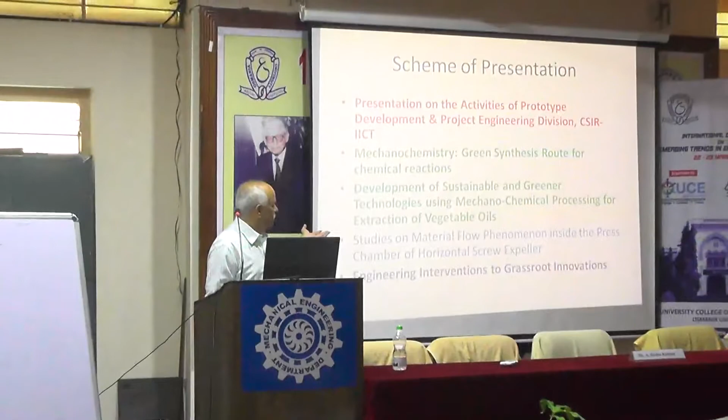I just try to take you through a brief spectrum of activities that I am currently involved in, and some part of it which is part of the talk, part of the work I am currently doing. This will give you a bird's eye view of the activities that go on. My scheme of presentation will be like this: I talk about what our department is, what we are doing, and then how I associate mechanical engineering with the synthesis of chemical reactions, and then what, as an engineer, particularly a mechanical engineer who doesn't know chemistry, the scope is and what you can do.

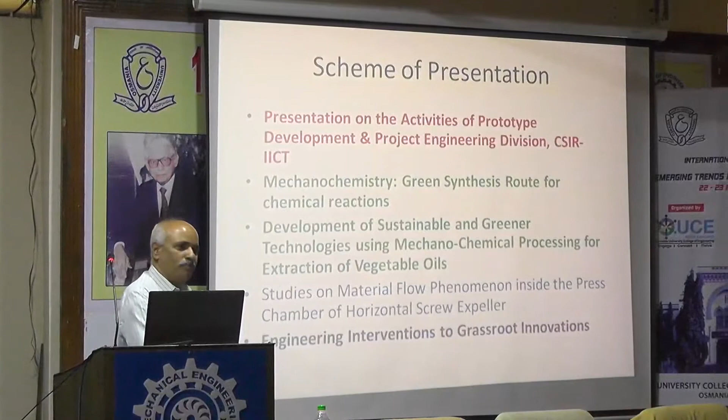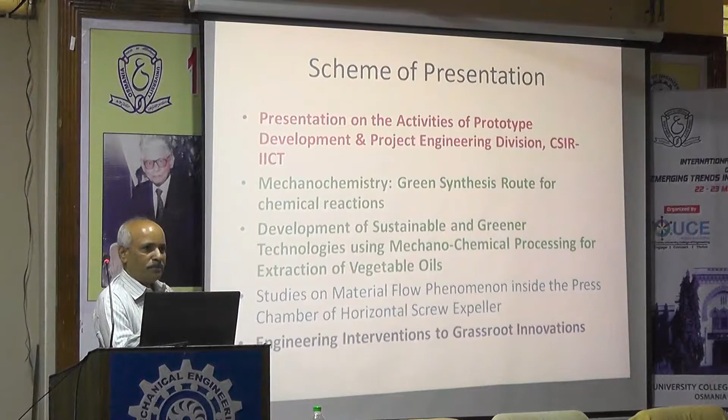So I'll take you to the development of greener technologies for extraction of vegetable oils through mechanochemical processing. And finally, we try to do something very interesting as a mechanical engineer, where we generally try to do mathematical modeling of various flows and stresses. What I am doing as an intervention into grassroots innovations, I'll try to cover as the last part.

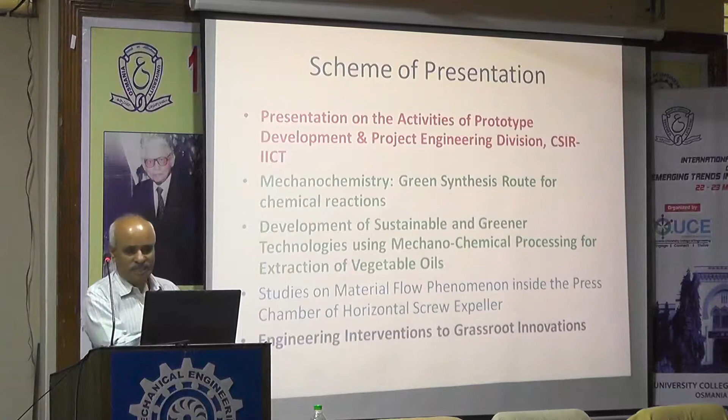So let me tell you about my department. My department provides electrical services and utility services like steam, air, water — all those that a chemical laboratory generally requires. We also provide design services for the complete institute development, particularly when it comes to construction and organization of facilities.

But as a mechanical engineer, one has to live like a Roman in Rome, because of the scope that we have. One of the simplest examples is mechanochemistry, where we use the understanding of mechanical engineering, particularly high energy milling activities that we generally do for metals. It is very prevalent in the field of metallurgy, where we look at size reduction as one of the important aspects.

So we try to associate ourselves where high energy milling, or high energy mechanical energy, is applied for conversion of chemical species into various products. I'll give you detail about it as I proceed. This is exactly what I am doing as a mechanical engineer in a chemistry lab. I faced a similar question when I was at the National Metallurgical Laboratory as a metallurgist — what is the role that I have?

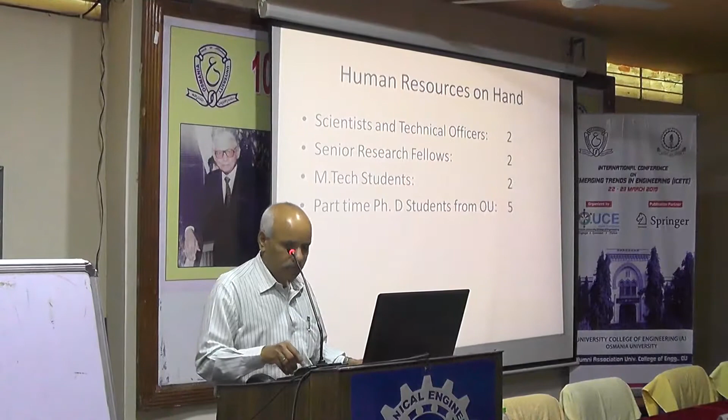Of course, as I said, it is a central workshop. We have all machining, fabrication with me, and they are working in the biomass gasification area. There are about 10-15 students registered with me from mechanical engineering, from OU particularly, but there are 5 active students working, and now some of them are very close to submission.

Now I just try to give you a bird's eye view of what is mechanochemistry, what is this green synthesis route we can conceive for chemical reactions. Particularly when we see as a mechanical engineer, when we apply high energies, what happens is the matter undergoes a shear deformation, particularly when you look at ball milling or other processes, where we try to create defects in the material, though the elevated state is the activated state.

The matter is ready to associate itself at low energy with other materials. With this particular activity, what we can do is mostly related to the area of solid state reactions or solid state changes that we see. Particularly the reactions can be between solids and solids, or solids and liquids, or solids and gases.

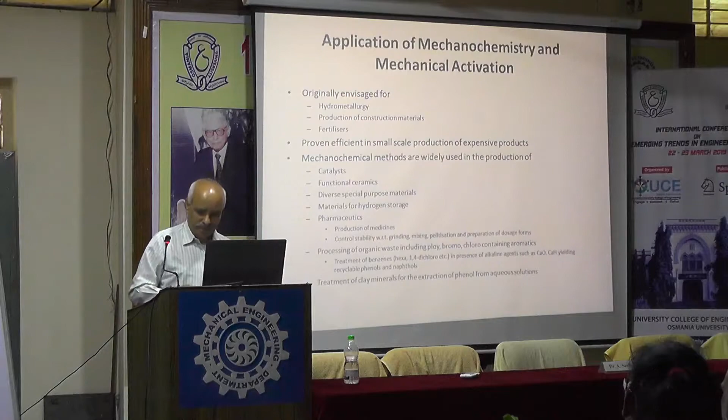So particularly another area is the treatment of clay minerals. One of my colleagues was working particularly on the development of ceramics in that area. There are some potential applications, but I think I can move on.

One example I try to tell you is the solvent shakedown. Normally chemistry people know that solvent extraction is a very popular area when you want to extract something from a synthesis. One immediate step you do is put a solvent. The ranges at which we take solvents, these solvents - one is carcinogenic, the second is highly inflammable, and the ratio at which you take it is 1:6.

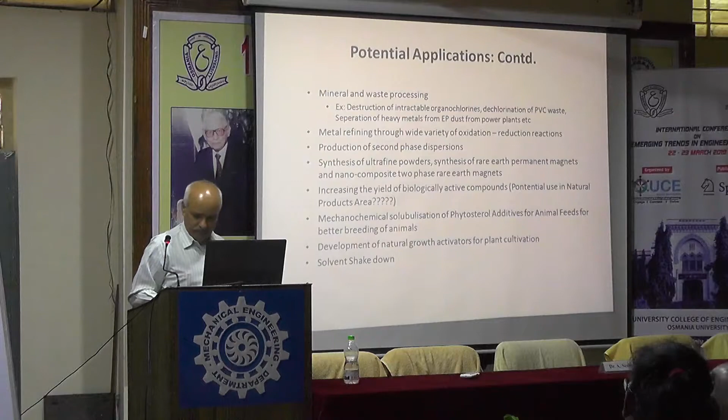When you look at that, you can bring down the solvent usage when you use the mechanochemistry route - instead of 1:6, it can come down to a 1:2 or 1:3 level. So it's a substantial reduction. That's one area, and particularly when dealing with nanoparticles, nanotoxicity is one thing, so people generally use solvent chemistry as an offshoot into that. So just to generally give you an idea of what it can do.

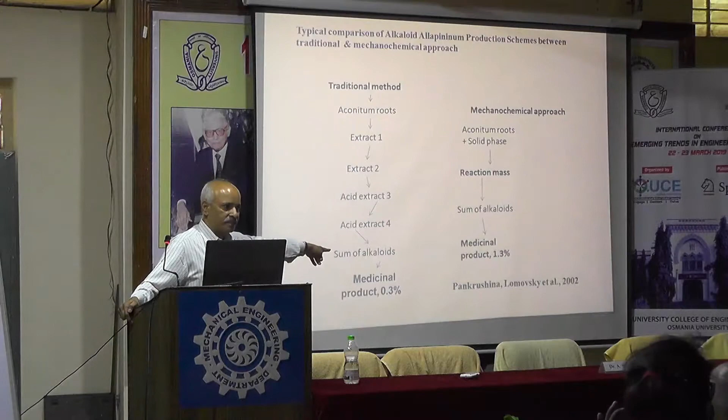A traditional method - many of you are known to use homeo medicines; aconite medicine is one which undergoes extraction of the medicinal product. The traditional route will give you about 0.3% bioactives, and when you pass through the mechanochemical approach, the bioactive yield can improve to 1.3%. So this is one of the examples of the amount of scale at which it improves. This is one very popular thing.

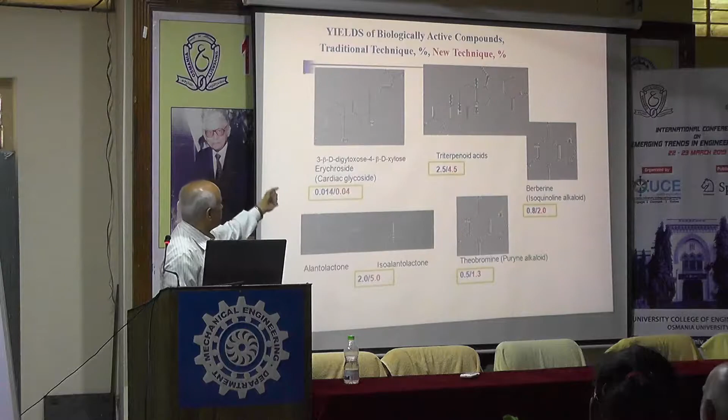Similarly, I gave some examples of various bioactives that can be improved through this. Every subject has its own advantages, and this is not without its own difficulties.

One of the key problems in this area is scaling up, because when we are looking at high energy reactions and high energy mills, many of them are limited to the batch process, which can be handled at maybe 5 liters per hour in terms of volume, or 1 kg, 2 kg, 3 kg. But when you are looking at industrial scale, this is one of the big standard limitations being posed.

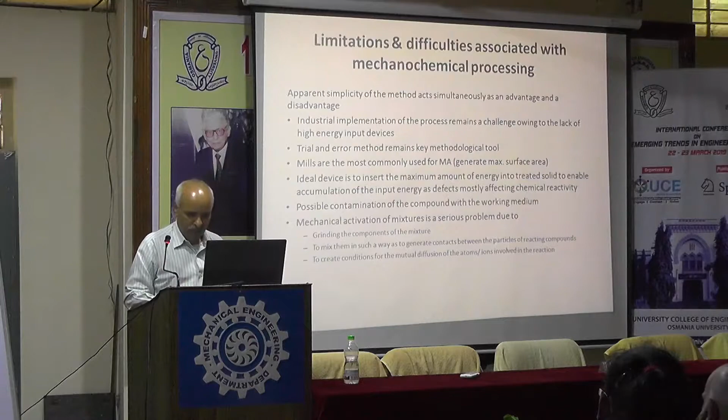The mechanics of the construction of the mills itself is a big challenge. I tried to give you the example of what we have faced - I shared that particular aspect at that time.

Now, when we look at who are the major people working in this field, in India there are two institutes: National Metallurgical Laboratory, where I was earlier associated, and ARCI, Advanced Research Center for Powder Metallurgy and New Materials. These are the two laboratories. I associate with ARCI for some activities. These are the two big research groups working in the field of mechanochemistry and green synthesis of products.

When we look at mechanochemistry as a mechanical engineer in a chemistry lab, I see it as an opportune area rather than a burden. So in fact that's why I took it up myself. Since I fear chemistry, I try to take it to the area where there are not much chemical reactions involved.

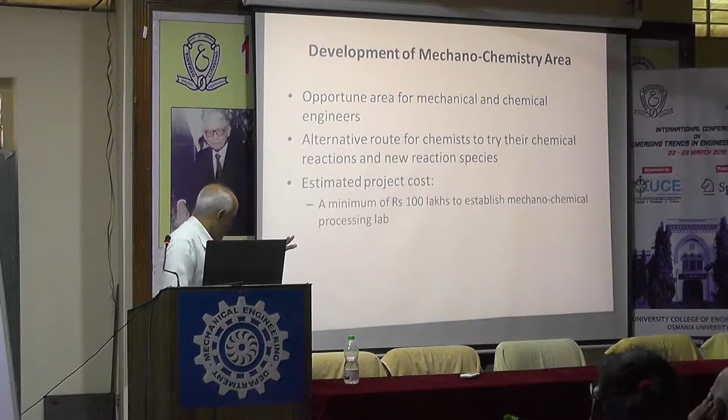Generally, if we look at the estimated cost of setting up a mechanochemistry laboratory, easily as a simple laboratory with small mills, the minimum investment will be somewhere around 100 lakhs. I just gave a general estimate.

Now I try to come to the specifics of what I wanted to share, of what I have been doing.

We all know vegetable oils are the mainstay for our living. Global production is almost 135 million metric tons, and India's requirement is now close to 8 million metric tons. 80% of all vegetable oils go into food application, 6% goes into animal feed, and about 14% goes to the production of oil-related chemicals. But particularly in the Indian context, we are the second biggest foreign exchange outgo after petroleum products - it is vegetable oils in India.

So there is a huge requirement for developing tree-borne seeds for the development of vegetable oils, or anything available as some amount of oil, and bringing it to edible conditions. This is a very huge requirement.

I just try to share some figures - of course I am quoting some older data. Domestic oil production is about 7.8, and we import 5.6 million metric tons of oils every year as a country. These are the various components of edible oil seeds, and their contribution in terms of production.

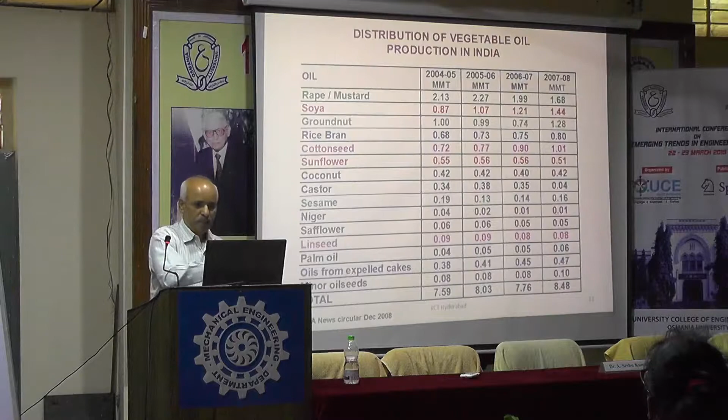Now when we look at vegetable oil seed processing, traditionally there are two techniques. There are other many techniques that have come, they take a shape, and they are like fly-by-night operators who vanish. I am also presenting something which at this moment may appear as a fly-by-night operation as a mechanical engineer, but I am trying to take it further.

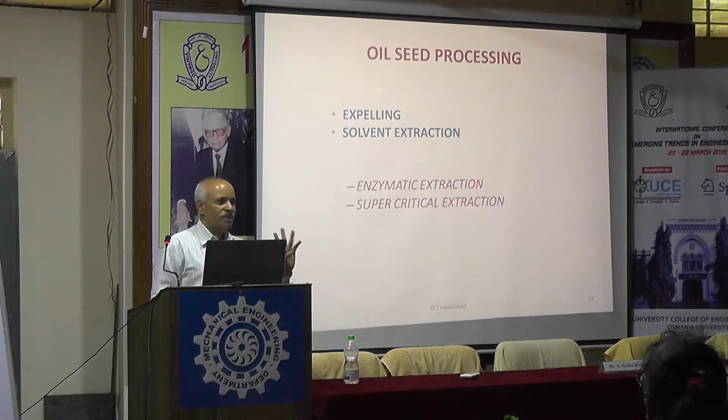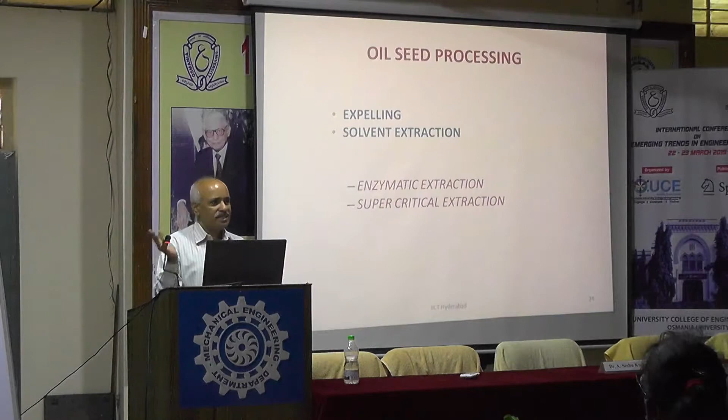Traditionally, the mechanical engineer has a very big role to play in the extraction of vegetable oils, and the second is the chemists or chemical engineers who do the solvent extraction. Other techniques, extensions like enzymatic extraction and supercritical extraction, are all extensions of what is done in the field of solvent extraction. So normally when we see the existing current oil seeds, these are like groundnut.

The first step is the mechanical extraction, second is the solvent extraction. Normally when the oil content of the oil seed is more than 40%, 35-40%, the first step that comes to mind is to apply mechanical energy to extract the vegetable oil.

As simple as ghani extraction in the olden days, which is now extended into a continuous extraction process through a mechanical expeller, where the seed mass is extruded over a screw between a barrel and cage, and the mechanical energy will expel the oil.

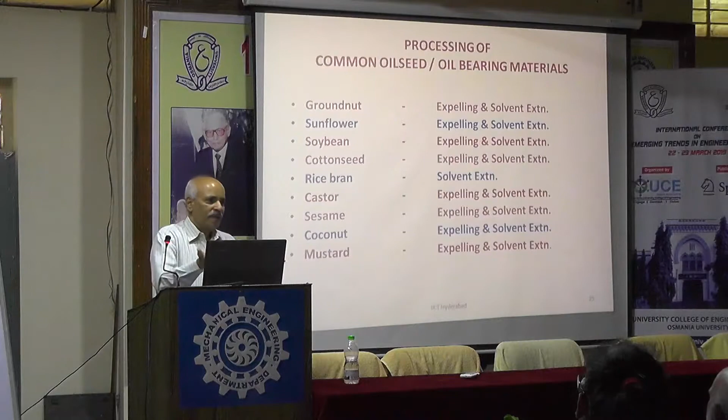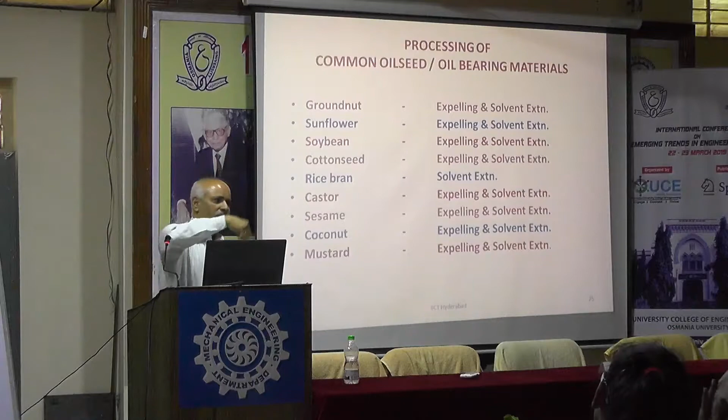Further down, when the de-oiled meal still contains extra oil, that undergoes solvent extraction. So the traditional methods are oil ghanis, mechanical expelling, and solvent extraction. Modern extraction techniques would be supercritical, enzymatic, or ultrasound assisted.

For example, ultrasound we are aware of, we use it in and out for machining, welding kind of things, and it is nothing new. Even here it's mechanical energy we apply.

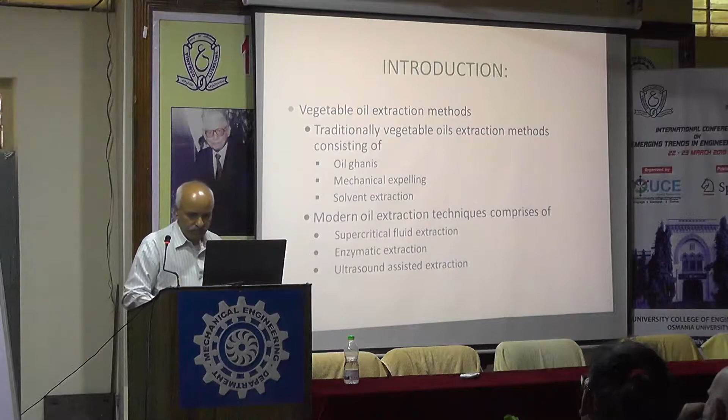Why should we look at vegetable oil extraction from the mechanical engineering point of view? One reason is the left-out oil in the residual cake is about 10 to 15%.

Normally the producers claim this, but it is much beyond that. 15 to 18% is the traditionally left-out oil in the cake, and to improve the oil yield, it will go for solvent extraction.

But when we bring it down further, solvent extraction can reduce the residual oil to less than 1%, but it has its own problems. One FDA regulation is that the solvent present should not be beyond 5 ppm.

Whenever we consume vegetable oil, the solvent content should not be beyond 5 ppm. Although today whatever oil we consume, we say it is basically 5 ppm, but it is always 20 ppm or something. When we want to bring it down to 5 ppm, the capital cost will exponentially increase.

For each ppm of reduction, the capital costs are substantial, because it is not easy to remove the trace solvents, unless you use high temperature separation and distillation, particularly when it comes to the inflammable nature of the oils and solvents.

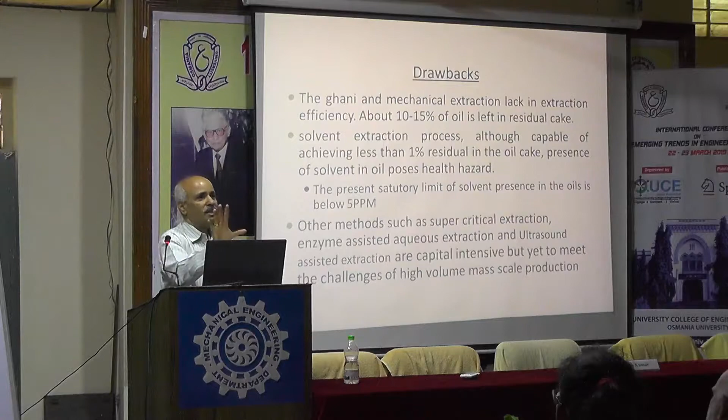Everything has to be handled very carefully, you have to bring it to room temperature, and since the separation doesn't occur easily, you have to continuously evolve technologies which are extremely costly.

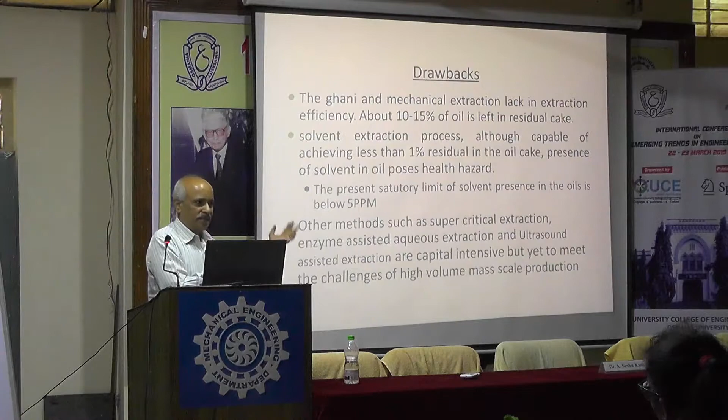And now today, this 5 ppm requirement has gone up in stringency to 5 parts per billion. I think from 2020 or 2025, US FDA is going to introduce this particular regulation. So you can imagine what is going to be the cost of vegetable oils.

So there are now various ways of looking at it. One thing is, can we not look at improving the yield of mechanical expelling?

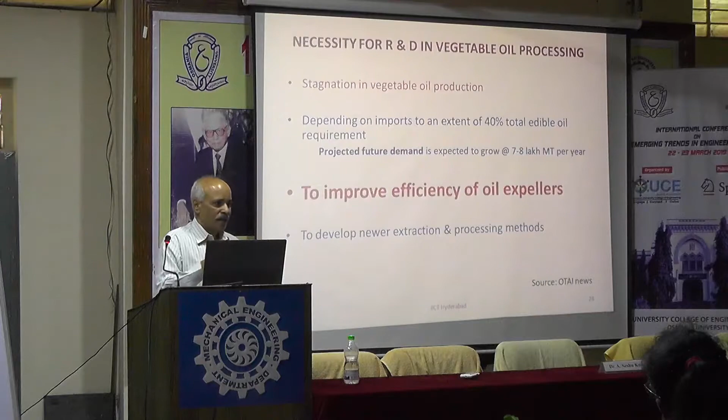So whatever we have said, particularly since 2004, I have been interacting with the vegetable oil industry as part of a team where I was associated at the Institute of IICT. We were looking at that time, and the technologies were stagnant.

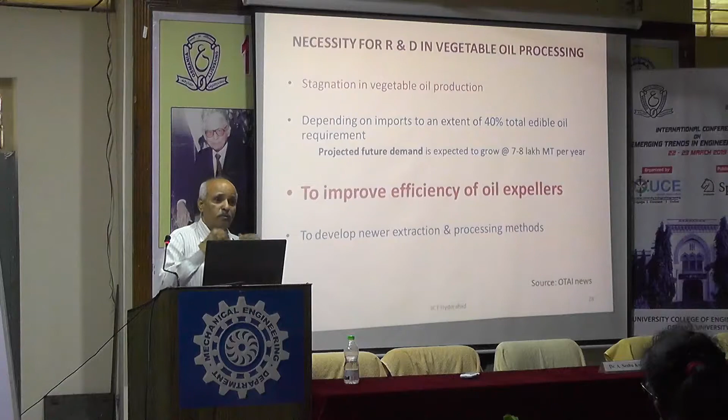Mechanical expelling was 100-year-old technology. Nothing had changed, and the majority of innovations were simple ones done by people who were not from the field of mechanical engineering. The subject of mechanical expelling was not understood properly.

So what I thought is, there is a huge scope. Why have people not understood what is happening inside when the vegetable oil seed goes through the expelling mechanism from one end of the expeller to the other?

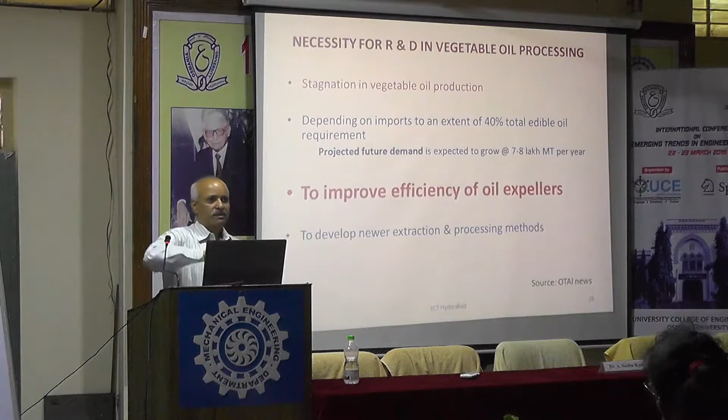Similarly, what happens when it goes into solvent extraction? So these are the things we thought: when we understand it at the basic fundamental level, we may be able to solve the problem.

So normally when I check with people working in the field, particularly the oil producers, they say 20 RPM is what I need to run the expeller at. When I question why 20 RPM, he says, no sir, we have been doing it, and we get whatever good yield is possible.

Then I said, have you ever studied exactly how the vegetable oil is stored in the seed? What are the energies? What are the conditions under which it can give away its oil?

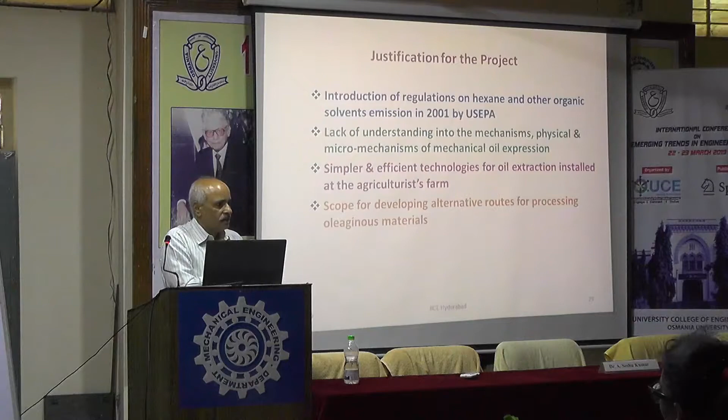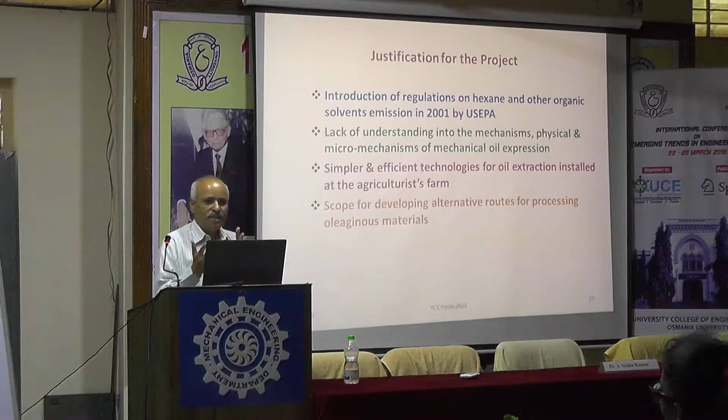When I started questioning, there is a lack of understanding in the micro mechanisms of mechanical oil expression. If we understand, possibly we can implement a simpler, efficient technology. I just question, because when I have one expeller for mustard, one for groundnut, one for karanja, why should I look at them separately? When I bring down the size, I can process every material. The only parameter I have to play around with is the oil content. So I started questioning people on these points.

When these questions were not answered, then we started. What was the interest? In fact, when I presented this idea to the funding agencies where I went to defend my projects, I said there are two scenarios for R&D and engineering. One is mechanical expelling - what we can do as mechanical engineers to understand the micro mechanisms of mechanical expelling, or the mass transport phenomena and what is happening. And then next is the alternate routes like mechanochemical processing.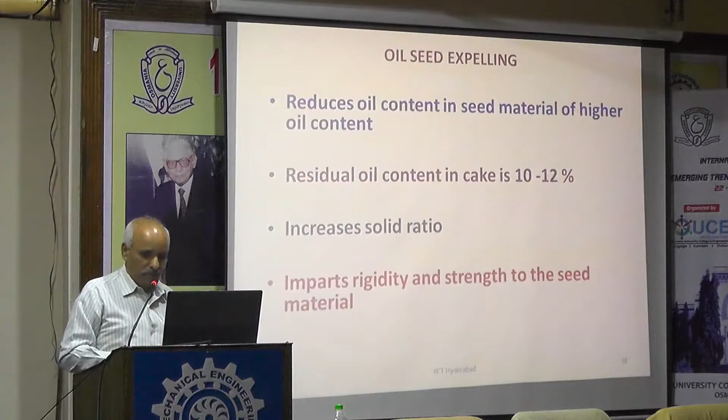So when you want to bring down the temperature, it doesn't expel. When it doesn't expel - Ghani expellers, people say it is not cold expelling, but still 70-80 degree temperature is still required. That's Kachi ghani expelling.

And this is what we tried to do as a prototype - it's out of the box thinking. Normally expellers are all horizontal, so what I tried to do is see what happens when I convert that extrusion into a vertical process, because some vertical extruders have given extremely good results, particularly in terms of millet processing.

Particularly the things you see in many ready-to-eat food products, like the kurkures - many of them come through real extrusion. Particularly in your houses, when you do the pressing of those things, it forms shapes - that is where we took the cue. Why not apply that here?

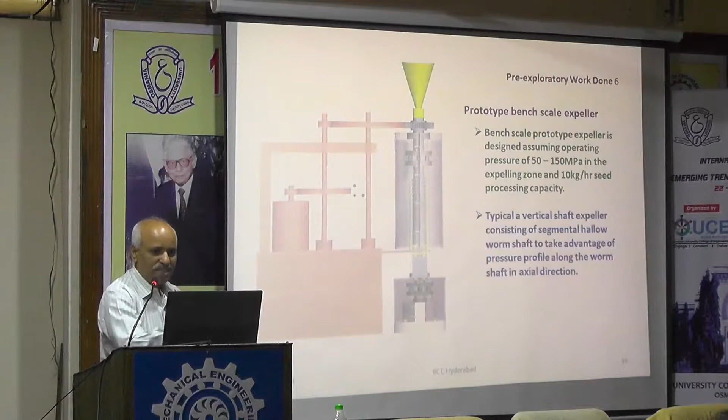Because we use the moisture, and the flow is there, and we try to cool the barrel - this is the kind of mechanism, and ultimately we made one prototype like this. This was meant to be taken as a low cost expeller. Of course this is not exactly an offshoot of what I presented, but as I said, the minimum expeller size is 200 kg per hour.

What we thought is, take the expeller to the doorstep of the farmer. So this is what we projected to the farming community, and we fabricated it in-house, and then used it for various applications.

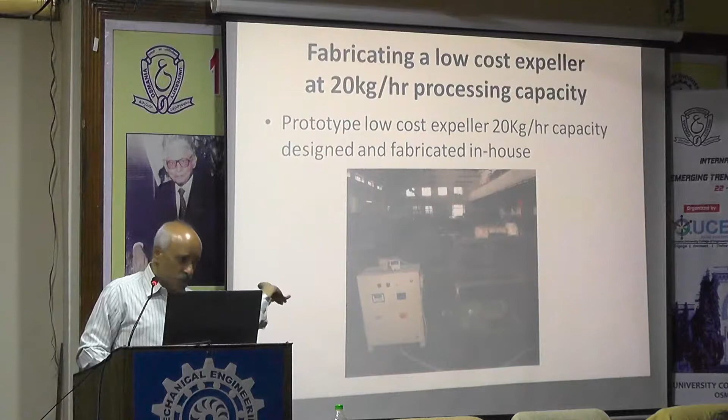Now I'll come to the actual crux of my work, where we looked at oil seeds. When I looked at the microstructure of oil seeds, the oils are stored in small tubes of 2 to 4 micron diameter and 20 micron length, inside a cell of about 100 microns. This is why, when we do size reduction to 20 or 50 microns, every seed particle becomes the same.

When we bring the particle size down to 20 microns, all cell walls are exposed, all bodies are exposed. These cells are mostly either cylindrical or spherical. So when I apply mechanical force on the cell wall, the oil can expel out.

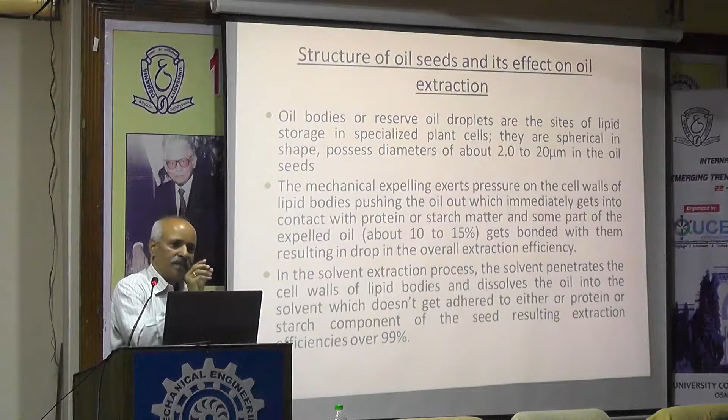That is what happens in an expeller, or when you do solvent extraction. The solvent percolates into the cell wall and brings out the entire oil, along with several other impurities, into the system. Or when you apply simple mechanical pressure at 20 microns on the cell wall, you don't require a large amount of energy for expelling. So with whatever simple pressure we can apply, can we not expel the oil?

Especially the idea came from when we put groundnuts in a mixie. What happens beyond a few seconds when you run the mixie, immediately you will see oil traces. Because the oil, you can see, has started giving up immediately. So this is where, when we support the comminution, the particle size reduction, the oil comes out.

Especially when the particle size goes down to 20 microns, for all the seeds, one of the important difficult aspects is the protein and the starch inside the seed. This is where the problem comes in. The existing mechanical methods have not dealt with the separation of the protein-oil bonding with the material.

So what we thought is whether we can use mechanochemical methods, where I have done particle size reduction, because particle size reduction at room temperature is very easy to conduct. Now I have to address only one simple problem still existing with my current invention: the separation of the protein and lipid bond. The protein and lipid bond was the biggest challenge.

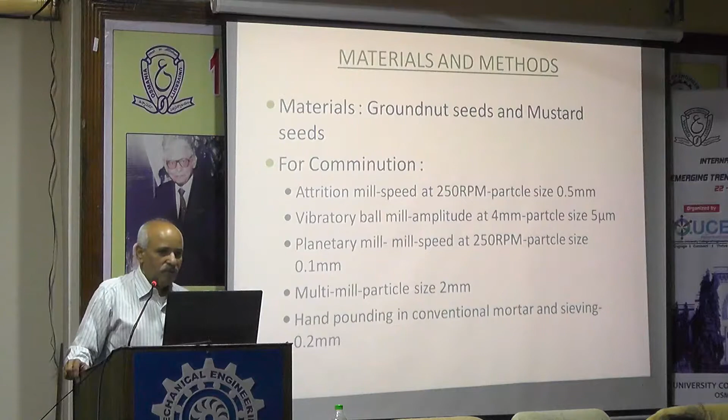In our work, we took groundnut and mustard as the seeds, and we tried various mills. Mostly our activity is centered around the multi-mill, where particle size reduction is much easier. Then I needed to zero in, because I am not a chemist, on what really breaks the bondage between the protein and the lipid.

Protein and the oil, or oil and oily matter, versus oil and non-oily matter - the protein-lipid bond - what should I use to break it? What are the things? So we tried various additives.

Let me tell you about physical additives. Because it's a polar liquid, even with temperature, we tried to use electro separation, both AC and DC, taking it to almost 120 kV, 40 kV at that level, to see whether something happens to break the bonds.

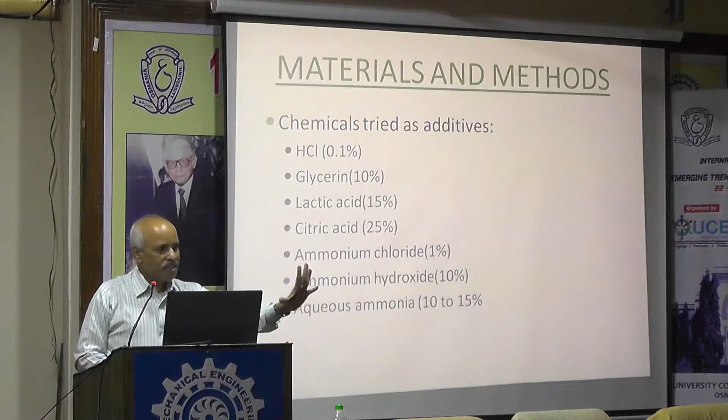But what we have seen is not much result from that. Among all these things, we found aqueous ammonia is the one which gives a good amount of breakage between the oil and non-oily matter.

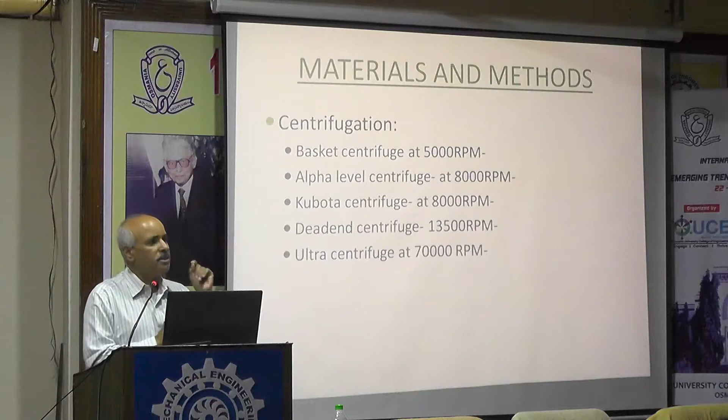This is a very important step, particularly for our process. And we did the simple thing with whatever activities we have done. Aqueous ammonia was found to be a suitable additive. Physical separation with G-force has not worked.

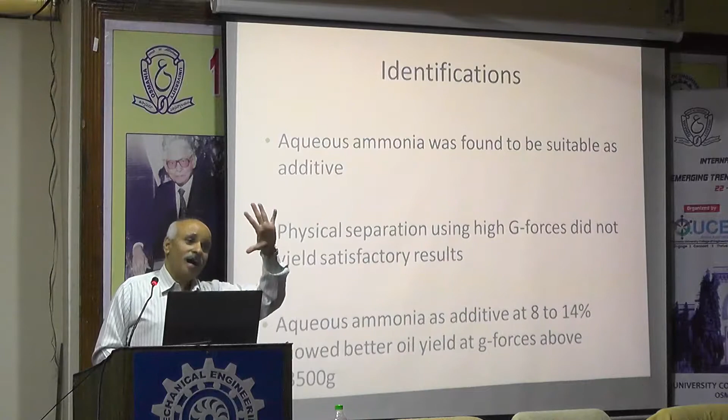When we look at the solid liquid separation, we touched the limits of solid liquid separation feasible in the laboratory. We used 10 G-force to 1 lakh G-force, using small centrifuges particularly the ones used for blood separation, which our sister laboratory CCMB had. That 1 lakh centrifuge can only handle 5 microliters sample capacity, and then 80,000 to 1 lakh G-force I can apply. Still, the separation was only 25%, meaning 25% is still left out.

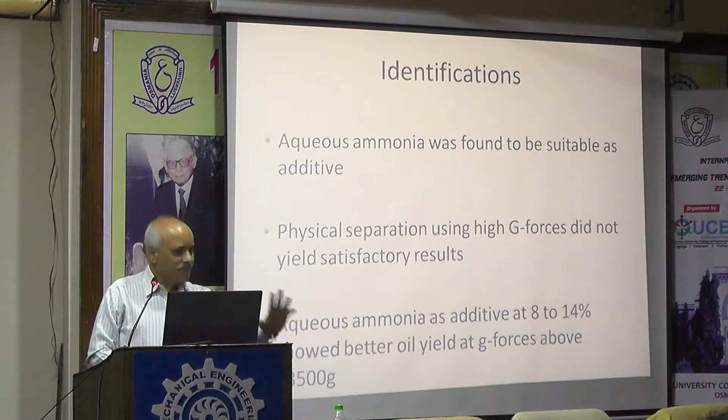So these are the problems that we encountered as mechanical engineers. We tried hard to fight with the oil for the separation. So when I applied aqueous ammonia, we found about 10 to 13,000 G-force which is easily handleable and which we can do. So this is the separation flow chart that we have applied.

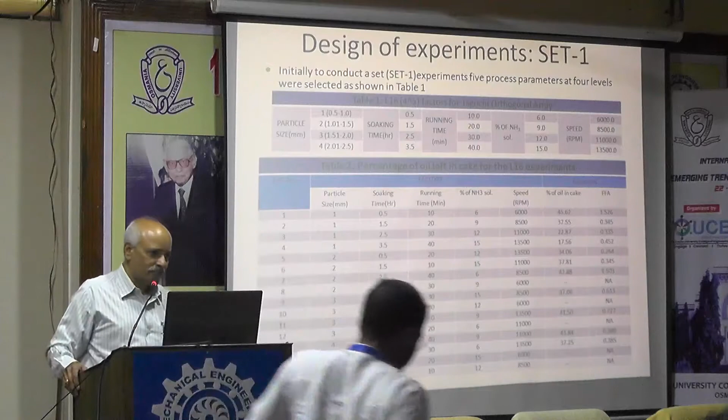Like any other mechanical engineer, we also tried to do some Taguchi application. Our parameters are particle size, soaking time, running time, and the performance measures we were looking at are the percentage oil left out in the cake, or the free fatty acid content of the oil. If the FFA content is low, it is good. So we tried to optimize these parameters. One of the significant parameters came out as particle size, second is soaking time.

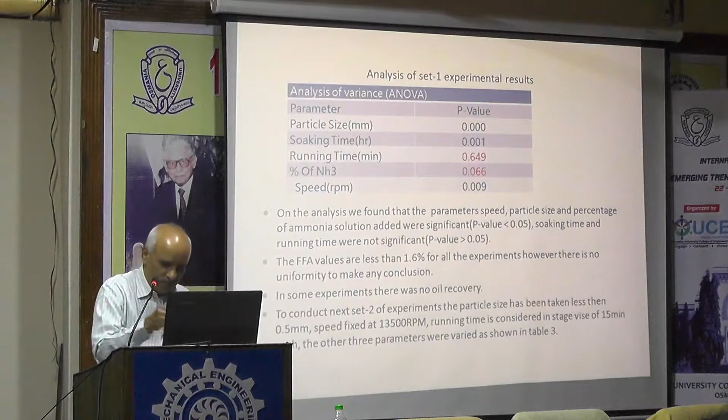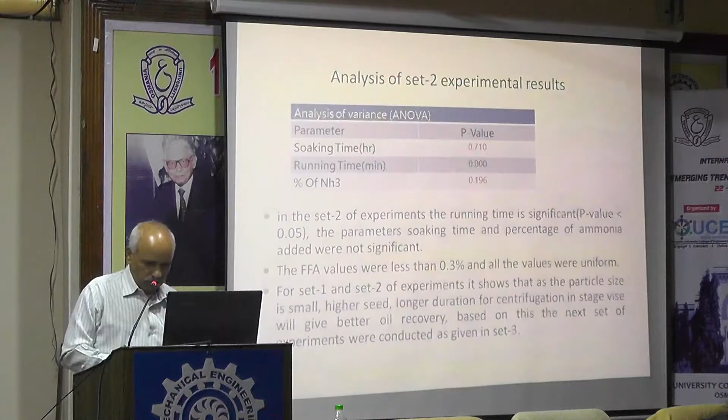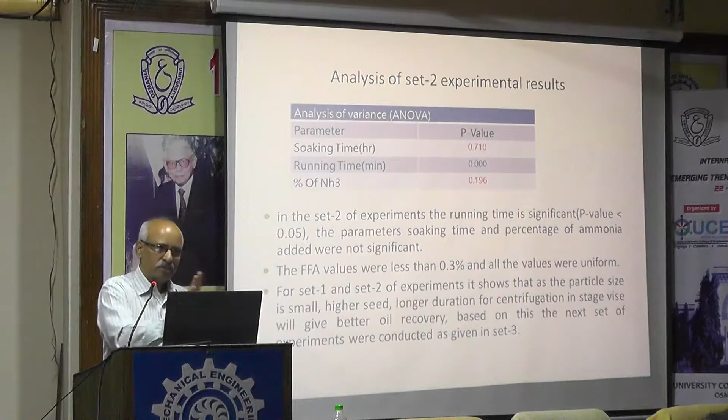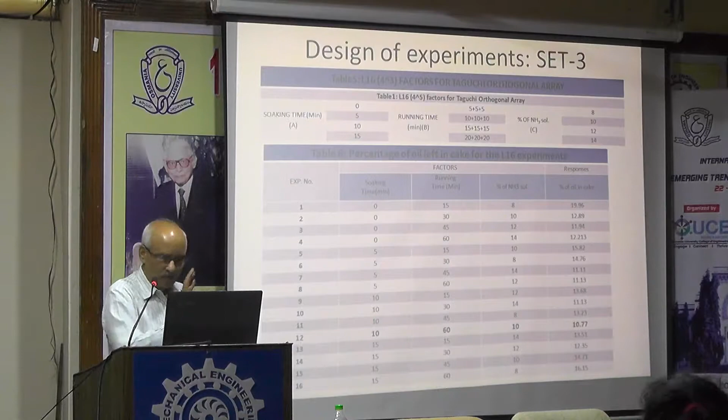So then we tried to improvise with another set of experiments, doing further optimization. What we found is percentage ammonia is one of the important parameters when we did the ANOVA analysis. With any of the vegetable oils, with this particular process, the FFA content has been very comfortable. So finally we brought down the Taguchi array to soaking time, running time, and percentage ammonia. Finally we noted soaking time is immaterial in our work. So basically the running time, meaning centrifugation time, and second, the percentage ammonia, are the two controlling parameters for the extraction of oils through the mechanochemistry route.

Ammonia is such an obnoxious chemical that you can't even stand near it when the reaction goes on, particularly when you are soaking with ammonia. So what is the next option? We need to remove the ammonia. So one of the methods to check whether ammonia presence is there or not is nitrogen estimation, which we tried to do.

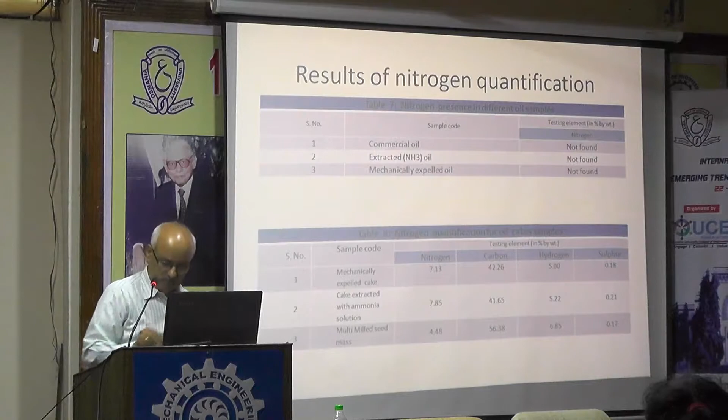When we did the nitrogen quantification using Kjeldahl's method, we found that the oil did not show any presence of ammonia. We then compared it with the mechanically expelled oil and various masses. Here I am giving sample 1 and sample 4 so you can compare the physicochemical characteristics of the oil in the next few slides. Sample one is the mechanically expelled oil you normally buy in supermarkets, and sample 4 is the one which comes through our extraction route. The physicochemical characteristics are comparable, and the first important thing is the free fatty acid has come down from 8%, which is not good for health.

Free fatty acid content of the oil drops from 8% to 0.15%. There is a natural refining that is occurring in our process.

Another important thing is the color. Whether we like it or not, the first thing people notice about oil is its color. The light color should normally be below 2.5 units, and we got 2.3 units of color.

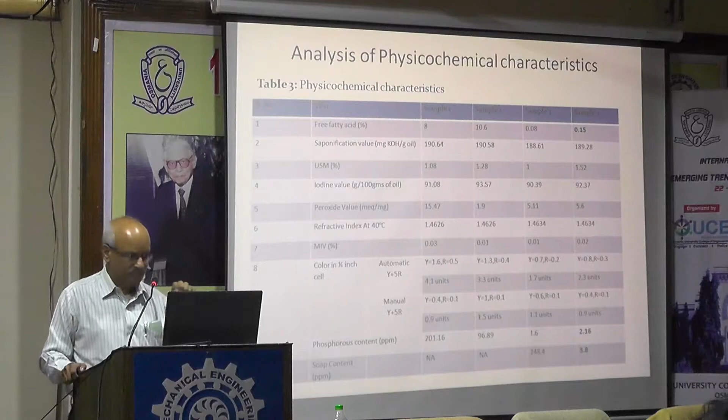We achieved below 1% free fatty acid content, and the saponification values are all very comfortable. Particularly the rancidity - when you store the oil for a long time, say 1, 2, or 3 months, the rancidity that comes in is defined by the peroxide value. The peroxide value of the commercial oil is about 15.47 meq, but what we have done is about 5.6 meq. These are the important observations we made, and this is exactly what we tried to patent in our process.

This process we have done at lab scale, processing about 250 grams of seed in batch mode. Now my challenge will be to upscale it to 1 kg per batch at least, to handle the G forces of 13,500 with a minimum of 1 kg of biomass.

Today the solid loading in the solid-liquid material is almost 50%. This is a challenge, a problem that can be worked upon by young engineers like some of you. If you want, you can come to us, we can work together, and then maybe make some prototypes of the components.

So as I said, in the process we have done, this is the challenge we face: upscaling from 50 or 250 grams per batch to 500 kgs per hour. This is the scale - you can see the order of difference. It's a big challenge, and this is a challenge which only mechanical engineers can solve and take to the next level.

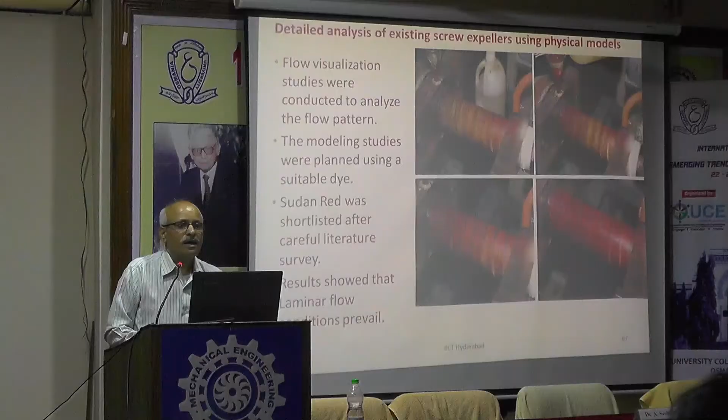We have been doing this in our institute, and these are challenges posed to us by chemists. Now let me quickly rush through the small mathematical modeling aspects of what happens inside the screw. First, when we want to do the mathematical modeling, we must define what the flow is - so what we try to do is the physical flow model.

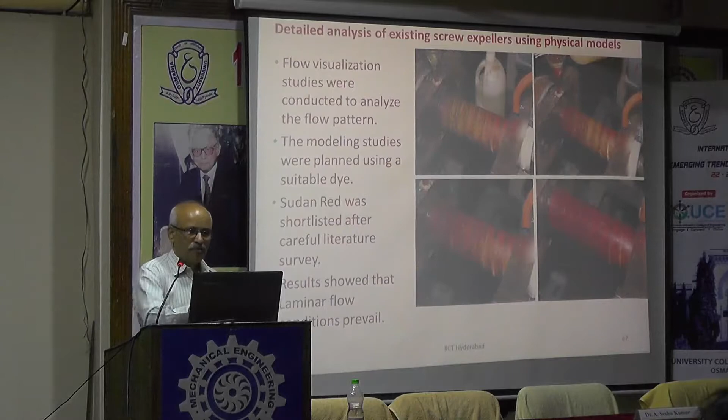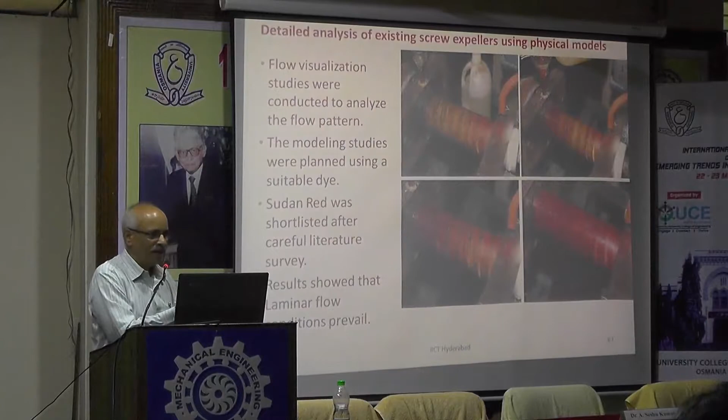What we try to do is use a typical screw expeller. We try to do water modeling experiments, as people normally say, but we do oil modeling experiments. I introduce a dye and run the expeller with the dye inside to understand what kind of flow is occurring inside, physically confirming whether it is a laminar flow.

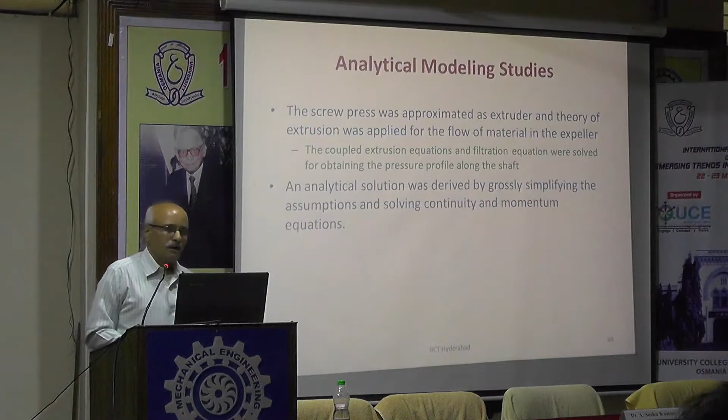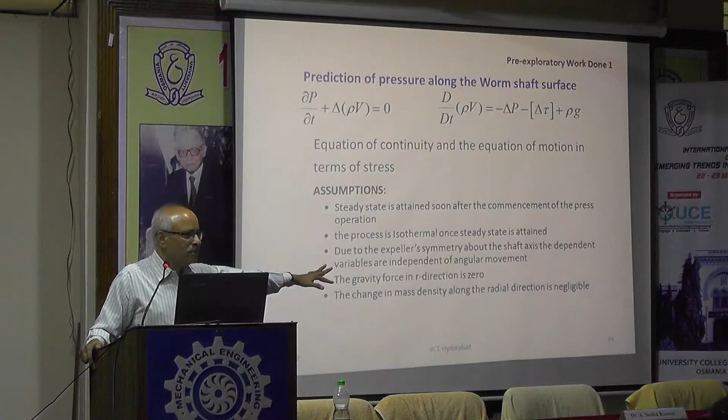So we try to insert the dye, and generally, without loss of much accuracy, we can assume it is a laminar flow. Then what mathematical models can we apply? All fluid flow problems are normally solved by combining the continuity and momentum equations - I'll just finish in the next 5 minutes.

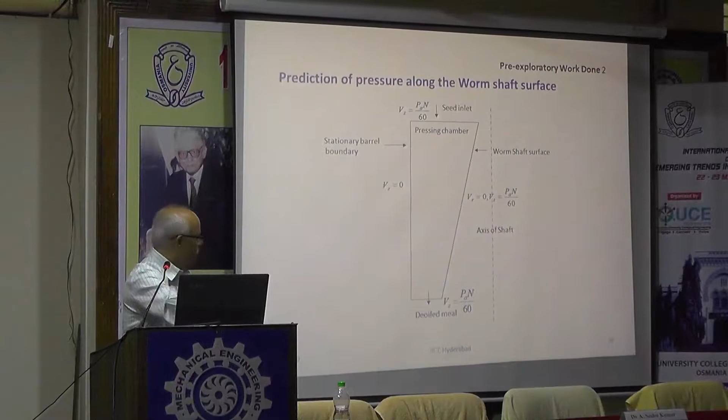Continuity and momentum equations, and these are the assumptions we made. For example, this is the pressing chamber - the material enters from here, and this is the material outlet, and these are the boundaries we created. Then we did the analytical modeling, and through analytical modeling I derived the expression for pressure.

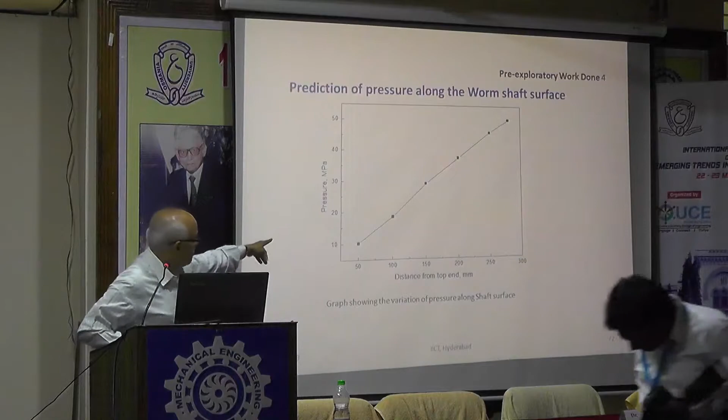When we applied this for both the barrel side and the other side, we found that the pressures experienced by the material, as the distance from the end increases, go up to a range of 10 megapascals to 50 megapascals.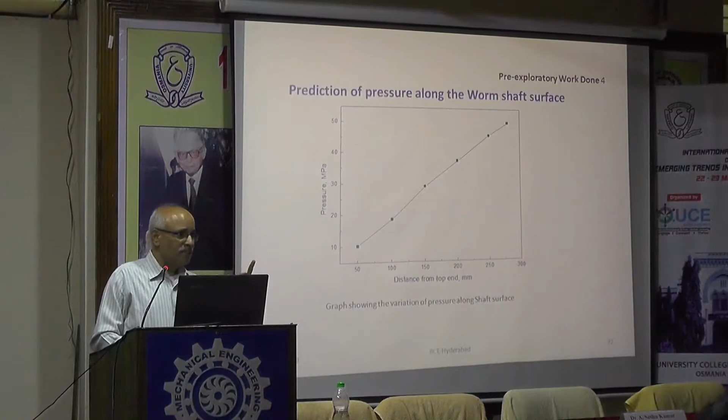This is what we say is happening inside the screw expeller. So can we not confirm this with computational fluid dynamics? We apply a computational fluid dynamics model.

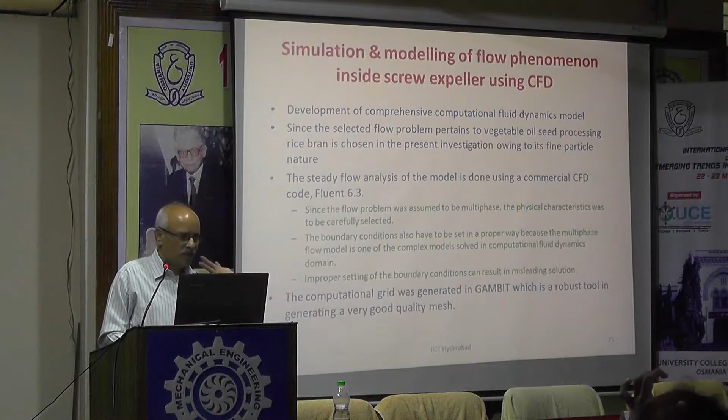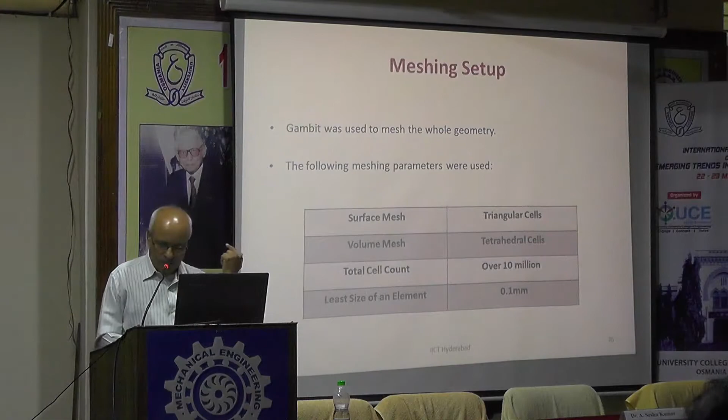We use Fluent, with the surface mesh and all standard techniques that engineers follow for modeling. We use tetrahedral cells, with a total cell count of over 10 million. This is the computational domain, the expeller, and the material that flows through it. These are the standard Euler and multi-phase models we applied, along with the boundary conditions.

These are the pressures we captured in the barrel. When the shaft speed is at 20 rpm for a throughput of 20 kg per hour, the screw experiences only 0.9 megapascals. As the speed increases, the pressure goes up to 2.79, then 10.3, and at 60 rpm it rises further.

I don't know why the people developing the expellers claim 20 rpm is sufficient. When we discussed this, the pressure we got was 0.94 megapascal, so that is good enough according to them.

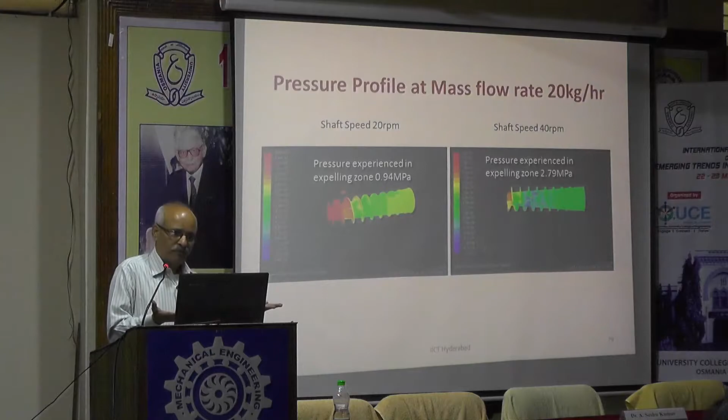But when we look at expelling at 60 rpm, the throughput increases. At the same time, the pressure experienced is also very high, frictional forces increase, there may be a slight rise in temperature, and better expelling results. But the industry still runs in a very traditional mode.

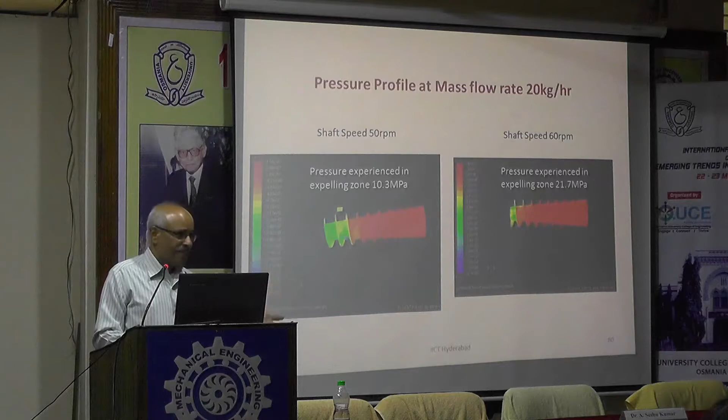It's very difficult to change their mindset. So I try to oversell myself with the industry fellows, but I don't know what exactly works. I'm trying to compare with two different throughputs.

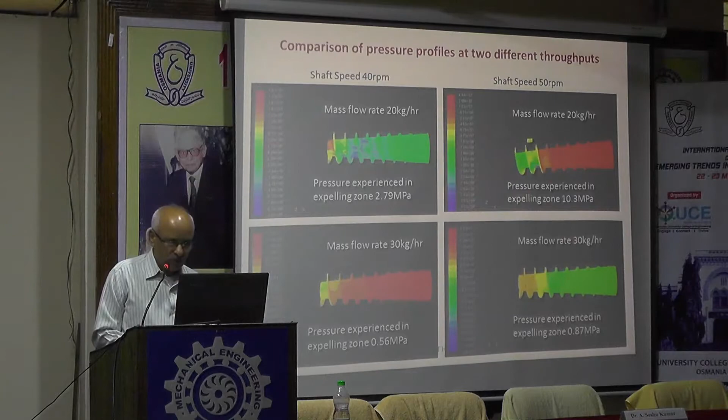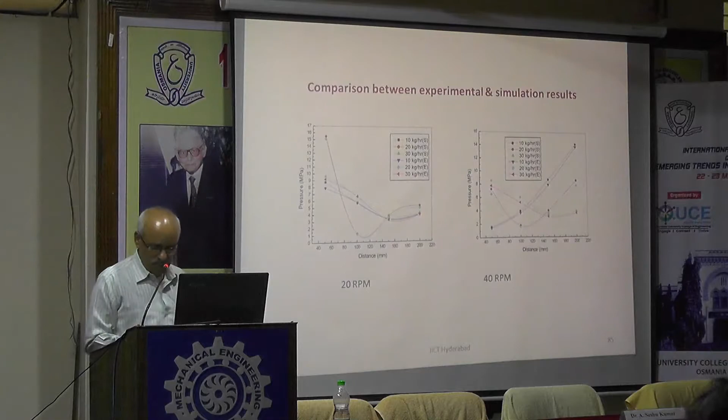This is what we tried to do for experimental validation. We used pressure transmitters to extract the pressure information. That is how I got all the data, and this shows how the experimental data compares with the simulation results.

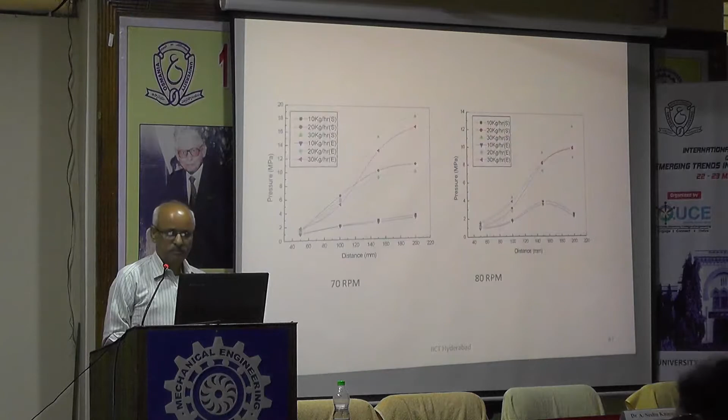What we noted is that 70 to 80 RPM is the threshold range at which the pressure developed is maximum, and the expelling can be maximum. But the industry still follows 20 RPM. So these are some insights we got: the threshold speed range is where pressure is maximum for a given throughput.

Now let me tell you the final part, maybe the last 3-4 slides. This is what right now at our institute we are trying to do as corporate social responsibility.

I should thank Brigadier Ganesh, an alumni of Osmania University, who has been at the forefront of championing grassroots innovators, particularly in the Telangana state.

He was the one with whom we signed an MOU. Through his walks across various villages, he was identifying grassroots innovators. We came together, signed an MOU, and are trying to give engineering interventions to grassroots innovators who have no engineering background but have enthusiasm to serve.

For example, there have been some Padma awardees recently. One person from Pochampalli, last year I think, got a Padma Award for a simple innovation that brought down the drudgery of his mother while weaving. So these are some of the things we are trying to do.

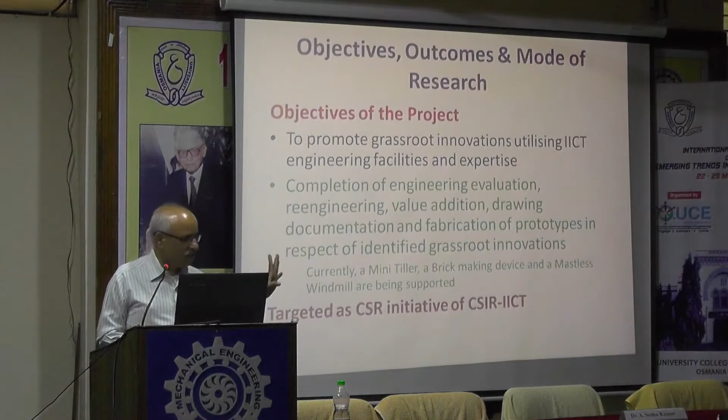This is our corporate social responsibility, and right now on my shop floor there is a 5-speed tiller. A tiller is nothing new, but present existing tillers don't suit the agrarian requirement.

A very enterprising grassroots innovator from the Nizamabad area came up with an idea, because the speeds at which you can drive and the amount of energy available for tilling and plowing the field wasn't something he was sure about, but whatever was available in the market didn't suit his requirement. So he came up with a 7-speed and 8-speed tiller. He came to us, we sat with him, completely dissected the entire thing, and then did the re-engineering.

This is the kind of prototype he made, and we re-engineered it, and then we tried to give him a prototype with all the engineering documentation. Some of you, if interested, can come to IICT, I can show you this prototype. The challenges are enormous. I don't know how that man really, with his own money, spent about 30-40 lakhs and went ahead designing it, because he has the heart to do it. He went with his heart and developed the product, and he was successful and is trying to market it. So we are trying to give him all the inputs - what is the torque available at the tilling, what is the torque required for rolling - all those things we try to give as a big package.

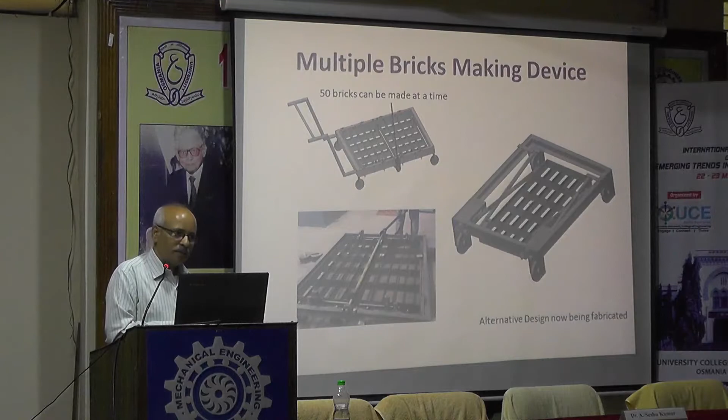This is a very interesting development. One Mr. Patan Saida developed a windmill - a mastless windmill, where normal windmills are big. He said it's a mastless windmill. The biggest trouble that the gentleman faced, Mr. Patan Saida, is this pump.

This is the pump. Everything was successful. This is at a place called Nellur in West Gogulapali. An enterprising fish farmer and an enterprising innovator came together and they developed this mastless windmill.

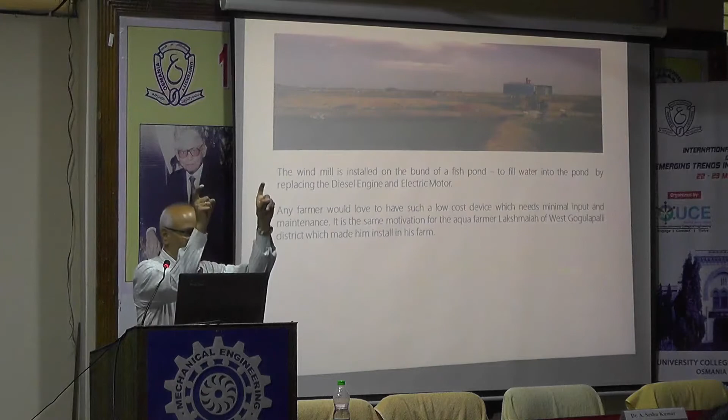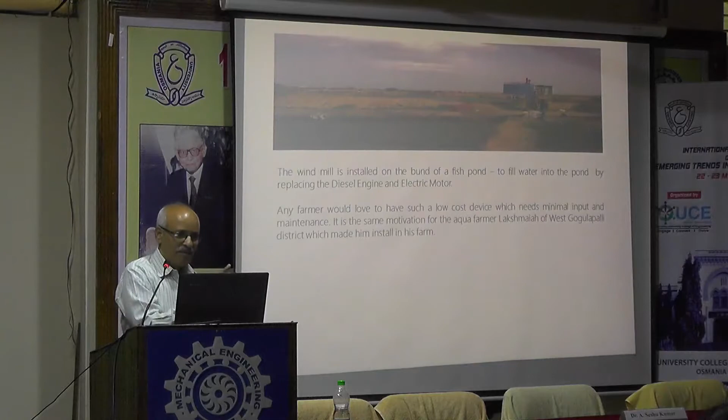So what we try to do is give some engineering intervention. We came up with a material that can handle seawater corrosion and saltwater erosion - a simple cupronickel was the substitute to SS316 which he was using. Of course cupronickel is slightly costlier, but for the past one year it has been running successfully without issue. Previously he was having difficulty - every 5-6 months he had to treat this.

So with this, I conclude my talk and thank you for your patient hearing.